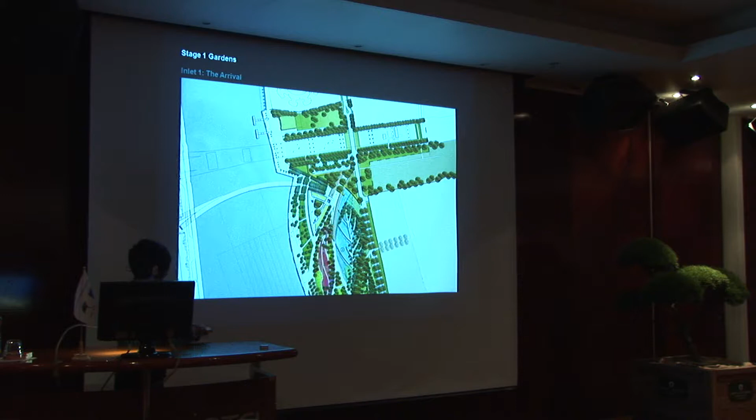And then we can draw off that water for our own irrigation needs and for the main water features. And then that water gets treated and pumped back into the reservoir, so it becomes a closed system, and that helps the reservoir to keep oxygenated and to not grow algal blooms when the weather gets too hot. So that was quite a good symbiotic relationship between our garden and the wider water strategy for Singapore.

It's an aerial view that shows that entry piece, the pedestrian bridge, the visitor center, and this aquatic garden.

The next leaf is a big color display garden, and then you have a series of paths that come down to the water edge. You can see how we were really trying to break down the edge so that people can get right down to the water. The boathouse, as we developed the plan, ended up on the northern side of the bridge, up in this area, with a slipway that allows boats to get down into Marina Bay. You can see in the cross section how all of the levels are really being defined by the flood levels of the bay.

At the lower level, you have the normal water level. Then the first pedestrian level is set just above the normal flood level, so in the event of flood, people can move up to the next level, which is set at the 100-year level. But all the buildings are actually set up at a level that's above the maximum flood levels.

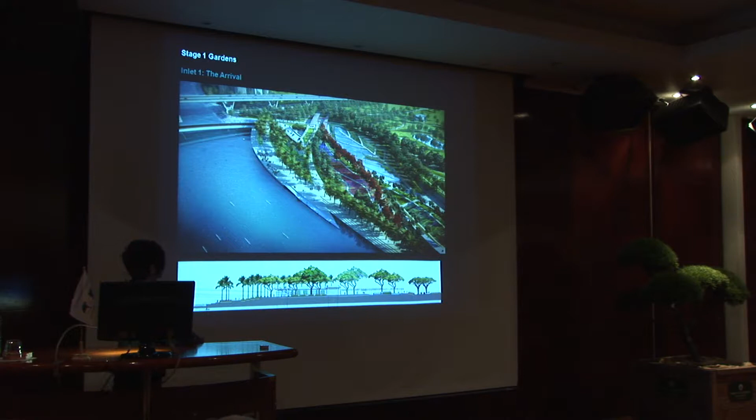It's a view of the visitor center, so people arriving at the park would come and get information, maybe look at an exhibition before they're drawn into the park to see the different activities and gardens. This is a view of the visitor center again, where at the top we also have an area where people can stand and watch the boat races. The building is completely open in the sense that you can move through it. There's a central courtyard that then has views out to the water, and we were always very conscious of this connection between the park and the water and framing views of the water.

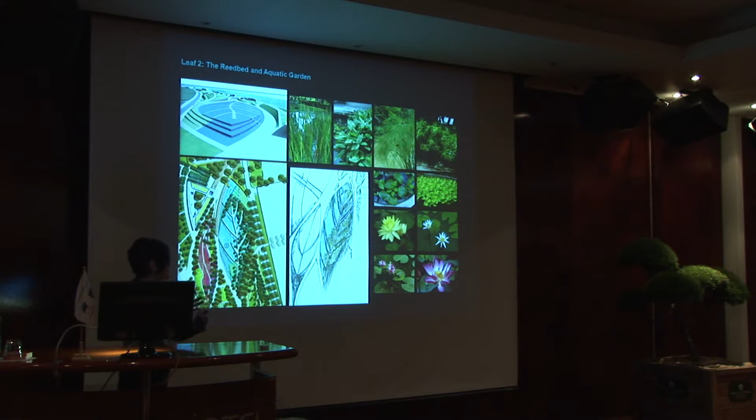The view of the second leaf, the aquatic garden, and its reed beds. You can see there's a series of terraces moving downhill toward the water. As it engages with the visitor center at this edge, the leaf is gently pulled up, and there are a series of terraces that create a water feature at the entrance where you can hear the water and you're drawn toward the park to move through it.

And a view of those water terrace gardens as you're moving through. They will be filled with aquatic planting, and the water is actually being filtered through a series of gravel beds in the lower layers.

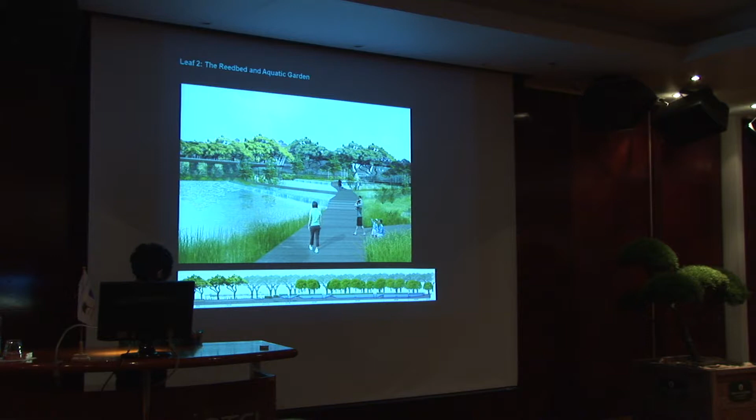Color garden. The color garden was meant to be a garden that can change constantly, so you might have different flower displays that change in color and feel throughout the year. That's located near the entrance because we felt there are a lot of tourists and people who would come just to get that picture at the visitor center and then get back on the bus and move on to their next experience.

We had a funny time trying to understand the brief for parks and how Singaporeans really live, what is their lifestyle. They kept talking about this thing, lifestyle. We want lifestyle. And I said, well, what is lifestyle? Lifestyle is how you live every day. And he said, no, lifestyle as a kind of - which we then slowly understood as being able to go to restaurants and food and beverage units and that sort of activity. It took us a long time to understand this concept of lifestyle.

So, yes, the view of the color gardens, and in these sections you can see how the ground is pretty much completely flat. We really wanted to create an elevated landscape, because if you get a little bit above the water, you start to get the breezes coming through, and you also get fantastic views of the skyline and the water. So the entire ground has been sculpted and molded in a way to allow you to have a series of different spaces at different heights, and the forms of those are all these giant leaf shapes.

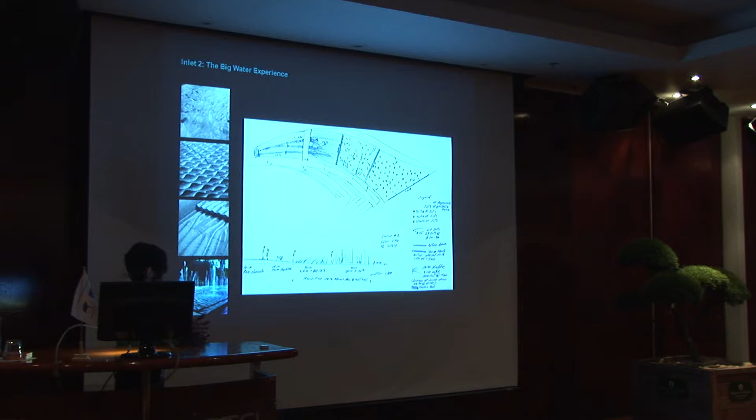Again, we tend to work a lot with water features, and we can create these different effects not only by how we sculpt the stone and create different effects just by gravity and water running over it, or by jets. This big water feature has a plant room underneath it, which is collecting the water from the site, filtrating it, purifying it, and then using it within the garden water features.

Again, a 3D view, and how we sort of create this sculpted edge. This is an edge that allows you to get down to this water feature, which can be drained down and used for big events. And so these sides can be used as an informal amphitheater seating area.

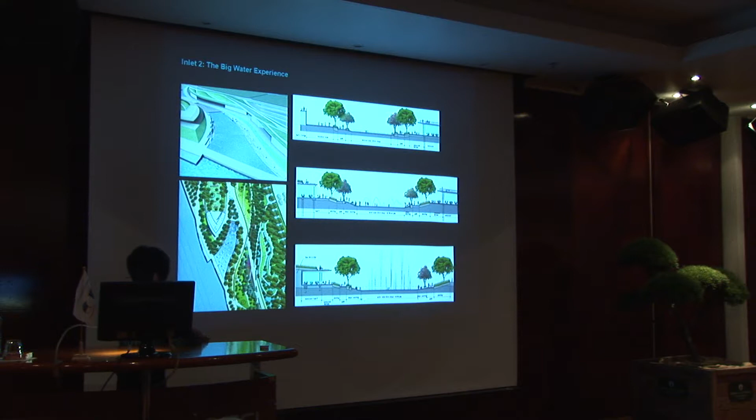And then the relationship of the restaurant to the main water features, and a view of that big water feature at night. You can see from each space, you're always being drawn through and into the next space by the next activity.

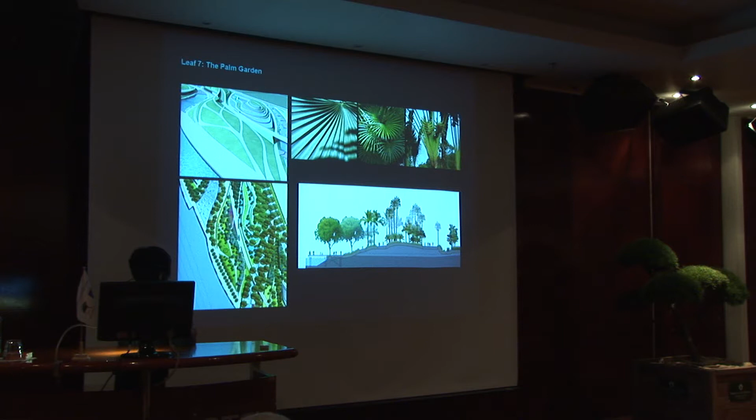The next leaf is the palm garden, so that will be a garden which will be a botanical display of all the different palm types and leaf shapes. And then this is another aquatic garden, which really takes its form from rice paddies.

Then the next area is what we call the Romantic Valley. That's a very long linear water inlet, meant to be quite an intimate space where people could have weddings and that kind of thing. So again, very lush, very dense planting, very intimate feel.

But again, with this very sculpted edge. So always there, within this natural world, there's always this very integrated, man-made, designed hand.

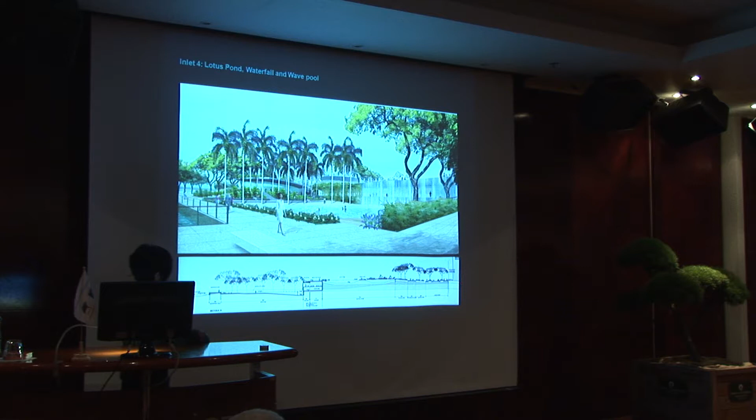But we did then create a swimming area so people could actually engage with the water. In this section, you can see how we're creating these sort of quite extreme level changes from what is a relatively flat site. This is the bar and restaurant that's tucked behind the waterfall.

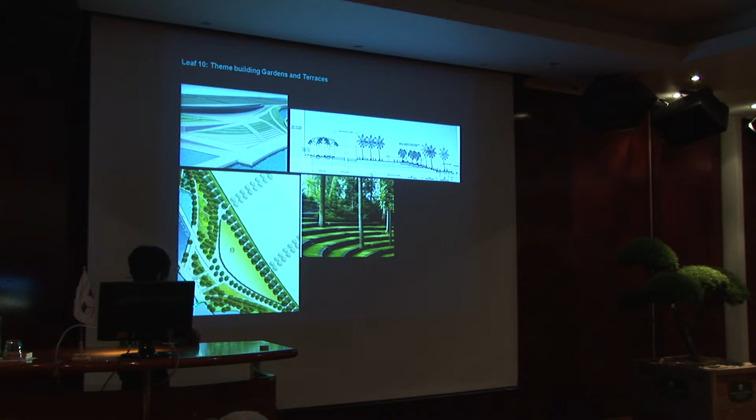And then at the tip of the island, where we start to meet the sea again, is a building which has yet to be defined, but it could be a cultural building, it could be a convention center. It's quite a large footprint of a building that is like a big leaf shape that tilts up and faces the water, creating an amphitheater space where people can gather for outdoor events.

And then finally, at the tip of the peninsula is a boat lock. This is the way they get bigger ships from the sea into the Marina Bay. They come into the boat lock and get lifted into this area.

And this channel is a more natural channel. Originally they just had a piped connection coming across our park to service the drainage water from this future residential neighborhood. So we built that into the design, and this is actually a stormwater drainage system that comes through here, with a much more naturalistic feel. You can see here it's normally filled with water, and then in a storm water condition, it gets filled up to here.

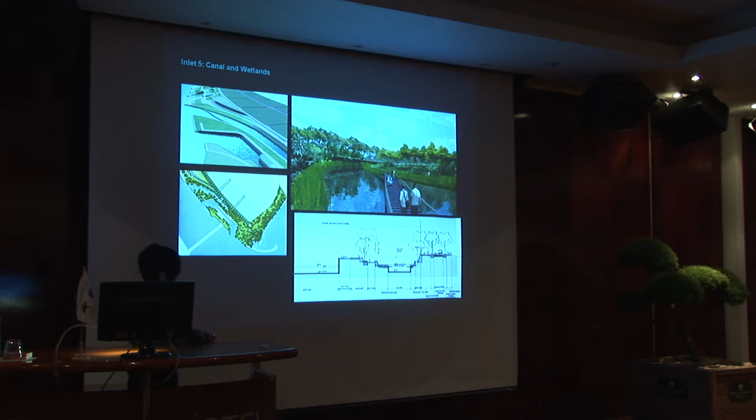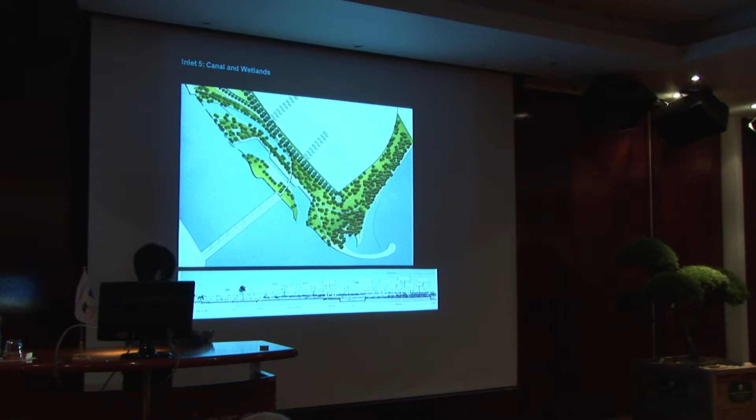And then finally, the tip of the island - this is seawater, this is fresh water, and then you get to the end and look out over the sea. So this is our site currently, and you can see the adjacent golf course, and this is Marina South.

Then I wanted to take you to a very, very different place. This is Mezyad Desert Park in the UAE, in the United Arab Emirates. And it's meant to be their first national desert park. Our client is ADACH, the Abu Dhabi Authority for Culture and Heritage.

And this region has just been awarded UNESCO World Heritage status as a World Heritage site. So hopefully they will move forward with the project.

It's an incredible site. This is a desert gravel plain with this mountain that rises out of the plain. And along the base of the mountain are many Bronze Age tombs from nomadic peoples traveling along - it's actually on this side, in the shadow of the mountain, mostly at night, but also late afternoon is when they would move. And there are quite a few tomb sites, important tomb sites, as well as all the natural sites of the wadis that are created as the water comes off the mountain.

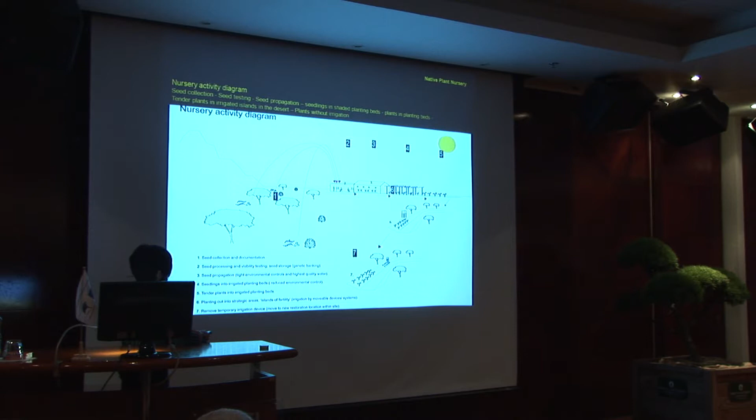The idea was to replant it only with native plants, but true natives actually from this site rather than from any other site around Al Ain or the region. So collecting the seeds on site and storing them in a seed bank and then propagating them on site. It was a real chore with numbers, trying to imagine how many seeds and how many plants one would have to grow to repropagate a desert of this size.

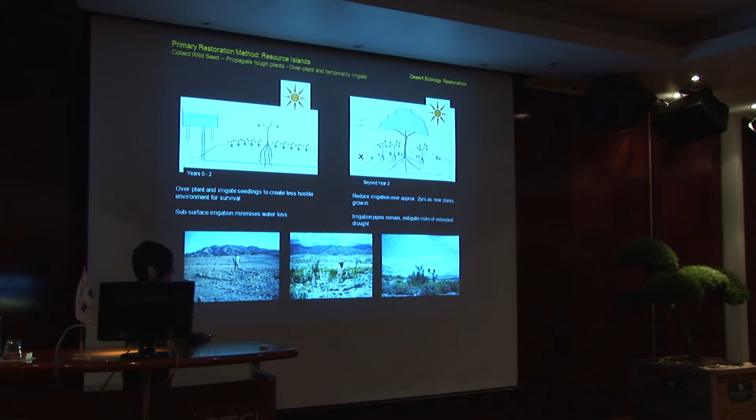And it's enormous, and there's a huge failure rate because of the lack of water and the intense sun. A lot of the plants will die, so the failure rate on the plants was estimated to be about 60%. So having to really grow and plan out the repopulation of the desert over a fairly long 10-year period of time.

So this was a survey that was done of the plant distribution in an area called the fenced corner, but that was an area that was fenced so that it wasn't eaten away by the camels and goats. So there we were able to see more or less what the native distribution of plants would have been, and then try and recreate that in a framework. In this case, it's a 10 by 10 meter framework, and then apply that across the site.

We were really concentrating on very specific areas because obviously it's a huge area to repopulate, but looking at how we start to jumpstart the whole process by locating the initial tree planting and smaller shrub planting in areas along the wadi where they are likely to get water in the event of rain, and strategically where we can place the plants.

We then did a series of tests out in the desert. We started to do some tree transplants to see whether or not we could transplant trees from the plantation band into different areas, so that would help to kickstart this whole process by creating the shade that would then create the protection for the younger seedlings.

So this was the project to design a nursery. There's a nursery building, which is a controlled, air-conditioned building to control the conditions within it. And then there's a big shade house outside of the building. As the seeds get to be a certain height in the plants, they get moved out to be hardened off under a shade cover. And as they progressively grow, they get taken out and exposed to more and more sun and more heat until they're acclimatized and can be moved out into the field.

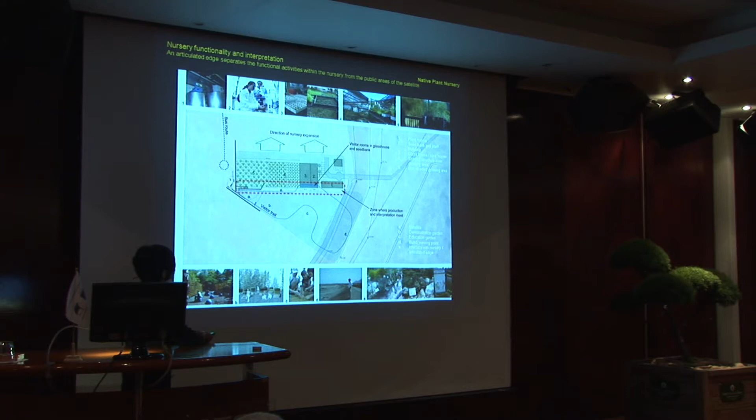So there's some images of what we're trying to achieve, and this is a partial image of the overall site. But you can see this is what we call the entrance landscape off of the main road between Mezyad and the Oman border, and that little speck there is the visitor center.

And then we developed a series of trails defining how people and small vehicles might be able to move across this terrain. The land has been disturbed not only by the goats and camels, but also by heavy trucks and vehicles during the exploration for oil in the 70s and 80s. So there's a lot of compacted tracks and trails across here. We need to ensure that we very carefully plan the vehicular routes and the pedestrian routes as we're doing this very careful desert restoration project.

So within the wider park, there will be a series of satellite buildings where people can go out, where they can get water to drink and maybe a map to orientate themselves, and then they can trek out and visit, in this case, the natural feature, which is this white wadi that comes off of the mountain, and in this case, the tombs, the Bronze Age tombs. And in this satellite, they can come and visit the nursery satellite and the nursery project for the repropagation.

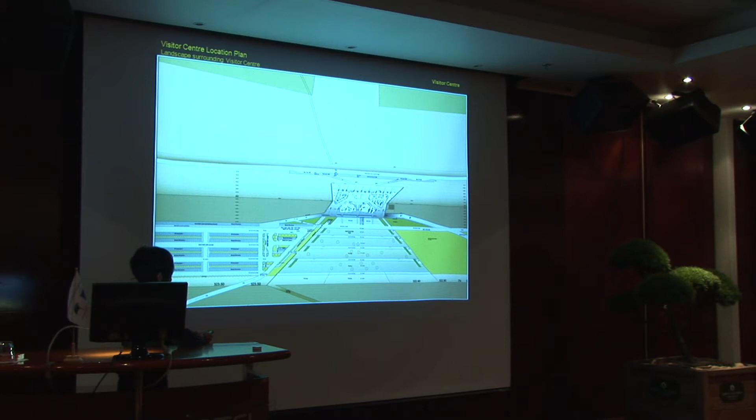This is a visitor center with an area where you can see an orientation film, education rooms for classrooms, and a big model of the site, so people coming can first orientate themselves around a model with a complete view of the desert before them, clearly seeing where to go. There's also a cafe, restaurant building, and the main exhibition pod.

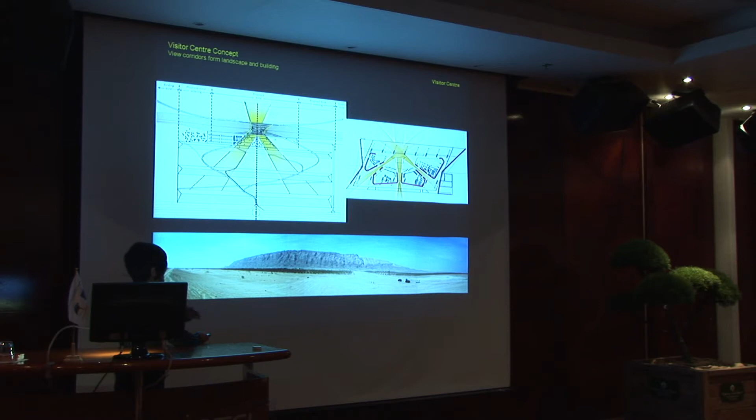We're very mindful of how one preserves views through and out into the desert, because that is really the experience. We didn't want the building itself to be the attraction, but really it's the view and the desire to move out into this landscape that was important.

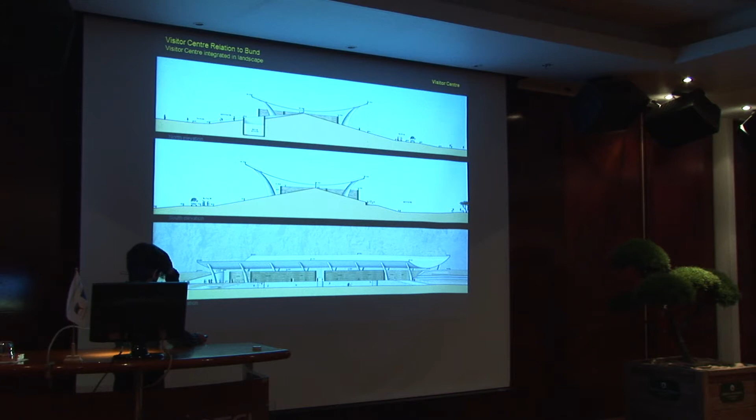We did that by locating the building actually on the sand bund, so that what you're seeing of the building is minimized and basically buried within the existing sand bund, which is the flood protection between the desert and the city. And then creating this big roof that would create shade cover so many people could gather there and be in an external environment, only air conditioning the areas we needed to.

This is a view from the desert side of the restaurant building and the education building. People would come out after the orientation, move on to electric vehicles, and then move out to the site.

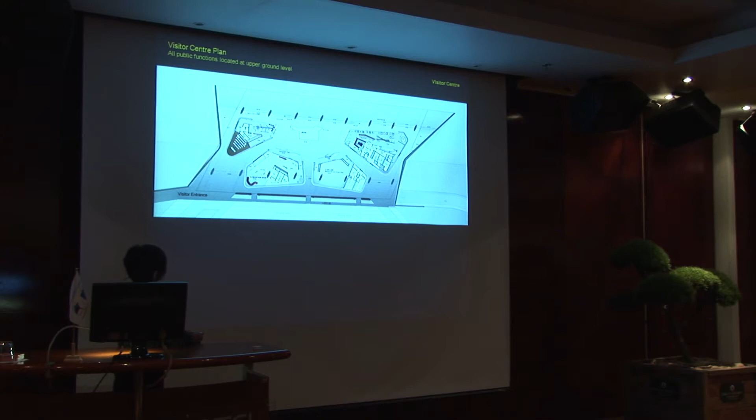A plan of the building, and a view from the big orientation model - as you can see, there are big views. So as you're within the visitor center, you can look out, orientate yourself, and then move out into the desert landscape.

I wanted to talk quickly about a project you've probably all seen, the Diana Memorial in London. In this case, it's really about how one creates these various water effects. As you probably know, we were trying to use these water effects to symbolize different aspects of Diana's personality.

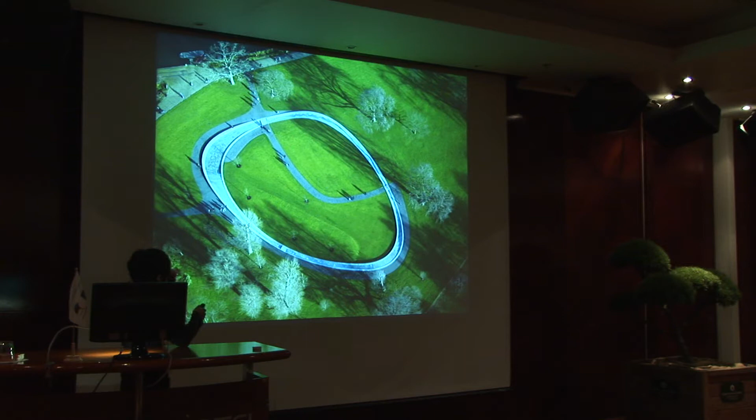But we did this by - most of the water feature is done using gravity. So it comes in at a high point, and the gravity is generated from the natural contours of the site.

We were also very mindful that we're working in the context of a listed park landscape, and within the brief, we had to work with the existing Serpentine lake. The water for this water feature is actually being drawn out of a borehole that goes 80 meters into the ground, located off to the left here.

So it's all natural water, and it's untreated - not chemically treated. It's an open system with the Serpentine: we use the water, it goes back into a storage tank, 10% of the water gets flushed out into the Serpentine again to keep down the algal blooms, and 90% of it is stored and topped up with 10%, then recycled around the feature again.

This is a plan view of that from the top - this is the source area. All the water is being pumped up into this high area, and then it falls gradually about 2.5 to 3 meters drop from this point down to the tranquil pool at the bottom.

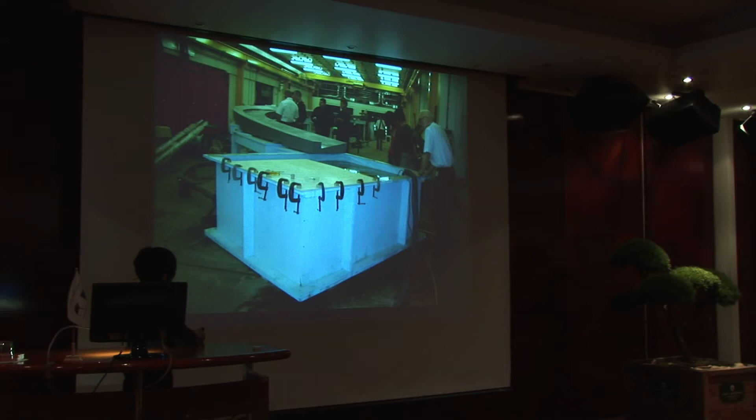This is at Imperial College in their hydrology lab. This is actually a quarter-scale model of the rock and roll piece, but we mocked it up full scale and tested it with a professor at Imperial College, to really send the water down, look at the effects, and be able to adjust it before it was literally carved in stone.

Seem to have frozen. Don't know if it's out of battery, but it seems to have frozen. Was Bruno on? Oh, okay.

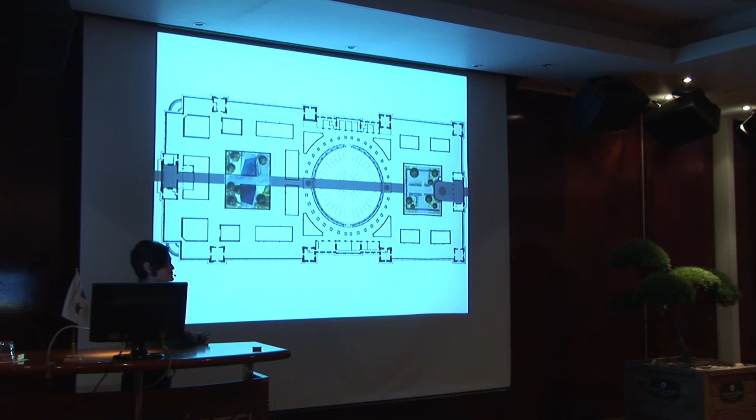And then just quickly, another water feature in the Treasury courtyards in London, in the government offices in Great George Street, where we did 2 different kinds of water features. This feature is over the top of the cabinet war room, so of course we had to be very careful with all the waterproofing and effects. But how can one use water to create these different effects? In this case, it's reflecting the listed building.

The water feature can be used and enjoyed by people sitting out in the cafe, but it can also be drained down and used for parties and events. And in the other courtyard, a very different feel, where we created this water rill. Again, the background sound of water creates a very tranquil atmosphere.

And this courtyard is surrounded by a library, so people can go out and quietly read a book and be in this very intimate setting.

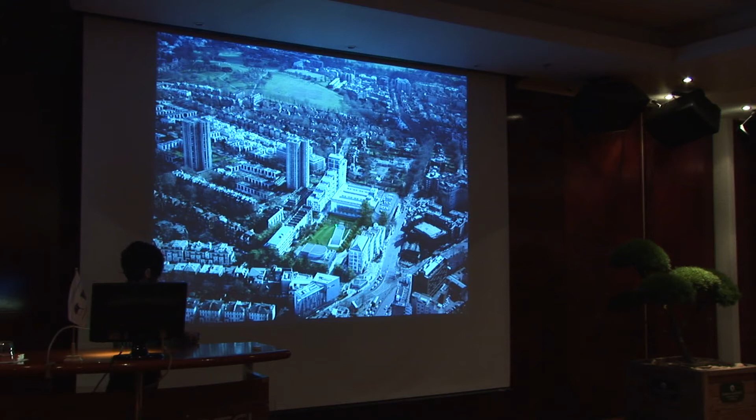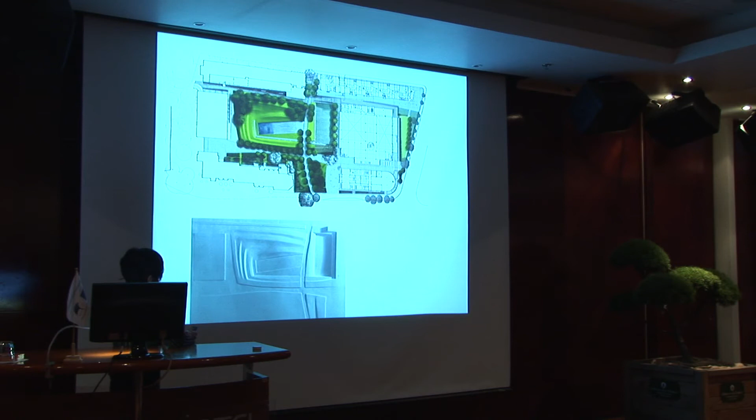Then another water feature project, a garden in Swiss Cottage in London, where the water feature really becomes the heart of this community redevelopment project. There's a theatre, a sports centre, the library, and the residential building, and the park is really the thing that's holding those various buildings together.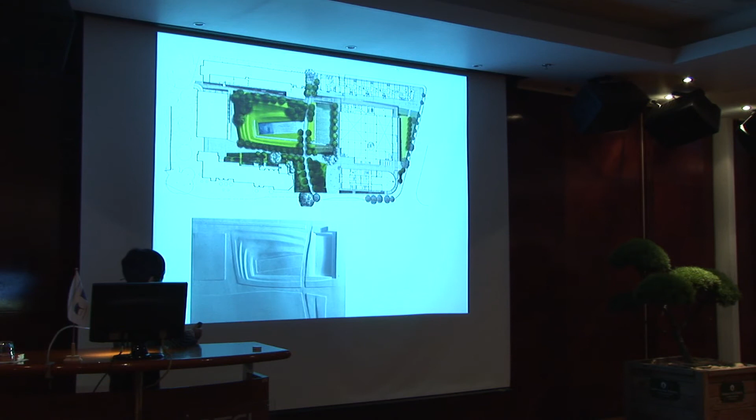This is a five-a-side football pitch. The water feature can be drained down and used as a staging area, with the natural amphitheatre that surrounds it working together with the theatre. The theatre foyer is in this area, so as you come through, you get these big views of the sports centre and the park in between.

When it's not being used as a water feature for children to play in, it's drained down and kids end up playing football and rollerblading and roller skating in the base of the fountain. It's a very well used community park where water is the sort of animating feature.

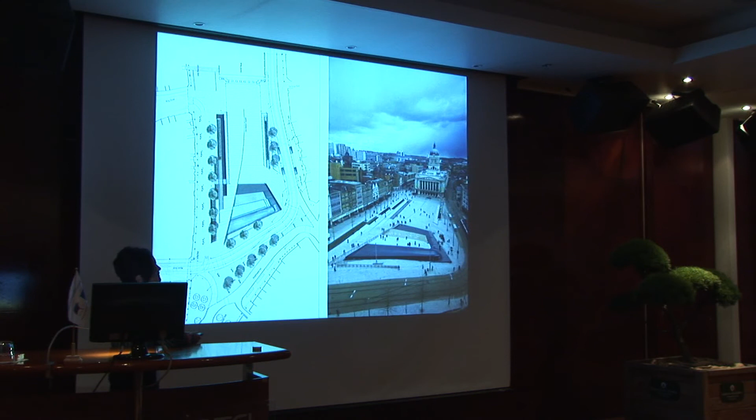In a much more public space in Nottingham, there's a major water feature which becomes the big attractor in the square. The wonderful thing about this square is that it's programmed almost 365 days a year. There's some event planned by the Nottingham City Council, from the big Ferris wheel to the Christmas fair to markets to all kinds of different displays. It's really very well used and programmed with events throughout the year.

I think it's stuck again.

Bruno? Oh, tell me how much time I have. Well, 5 minutes. 5 minutes, wow, okay, I'm going to whip through this then.

The interesting thing about these projects is that Solidere, as the development company, invest in the public realm before the buildings that come around it. They've acknowledged that if you create a high quality public realm, that will inspire developers to develop the adjacent plots of land. It helps to stitch together a city in a way that I think is really quite innovative. It's not done in all cities, and they've had the foresight and wisdom to recognize there's huge value in developing, designing well, and building public realm.

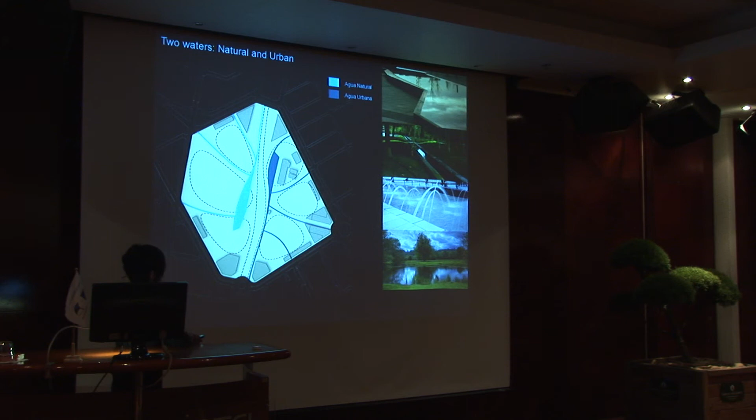Again, water was a very important starting point for the concept. On one side we have a natural water system, a big natural lake, and on the other side the urban water system, a big cultural water feature in front of the main cultural building. Those two systems come together to form the framework for the design of the park.

And again, using landform to define those bowl shapes. This is an image of the overall park.

So we have the main connection to the city, with the main train station here. This is the Northern Plaza, the gateway to the rest of the park. There's also a whole area to the south, a new residential area where we've been developing the streetscape and public realm play space guidelines.

As you move through the park, this is the main north-south boulevard, lined with a series of palms and jacaranda trees.

Then you move into this area, which is a cultural center. These are all existing buildings on the site, so all the old railway sheds are being renovated and will have cultural or educational functions that work together with the landscape within the park. Some of these sheds are being rebuilt and relocated to the perimeter to free up space within the park, but each one will have an activity.

In this area we have what we call the Huerta Gardens, display gardens for the traditional orchard garden that used to be present around that agricultural plain. This is a children's play area.

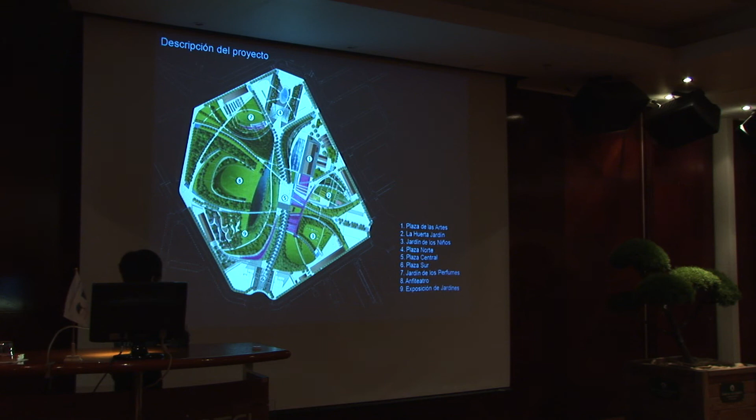It's raised up quite high. There's an existing substation here, so we've raised it up to be over the top of that, creating a natural amphitheater shape. And then in this area, a perfume and scent garden.

So that's the aerial view, where you can see the cultural building, the Huerta garden, the children's play area. In the back here, the Mediterranean display gardens, the amphitheater, and the perfume garden.

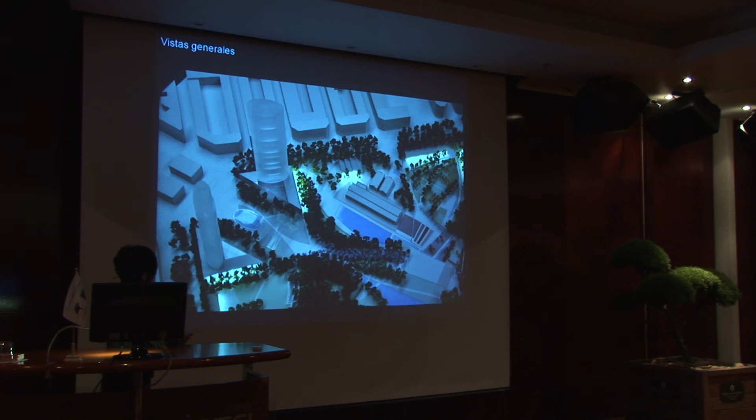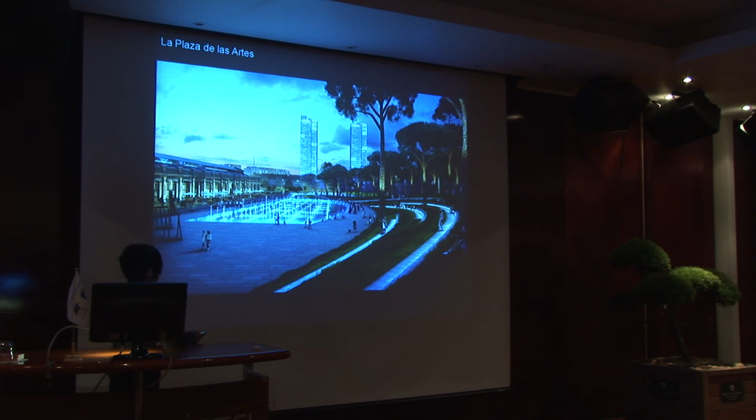These are some images of the model. The main water feature in front of the cultural center is very active, with lots of jets, a big display, and lots of light at night. It's where all the energy of the park is, one of the main poles of attraction within the park.

So each one of these spaces has a very different character and a very different use, and it's always framed by this landform, by this enclosing bowl, with a low point where we're collecting all the water and taking the rainwater as quickly as possible back down into the aquifer.

Valencia has a very high water table, so water is not necessarily a problem, but the challenge here is in the whole recycling strategy of the water.

I think I'm stuck again.

So this is a view of the main central spine with its flowering jacaranda trees. The idea is to have many different activities off of that spine, places where people can play, sit, rest, and be under the shade of the trees.

The main entry, the North Plaza, with its big water feature and gardens to the side of it, and then this is the main north-south path leading into the southern residential area.

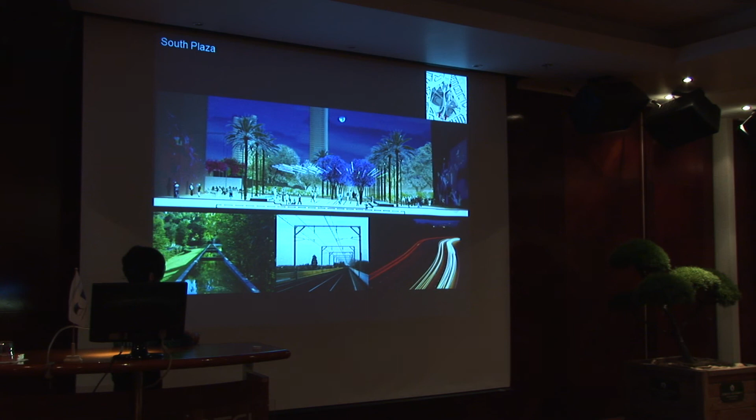The South Plaza, where we wanted to have a lighting art feature, a memory of the catenary systems and the electrification that used to run through this site, now going below ground.

The natural lake with its aquatic planting, also helping to filter the water. The amphitheater space, looking through into the floral gardens.

It's fantastic to be able to do a garden this big in Europe. I think we're very honored, and it's a very special thing to be able to do, because there aren't that many sites. To have given over this whole site to a central park is fantastic.

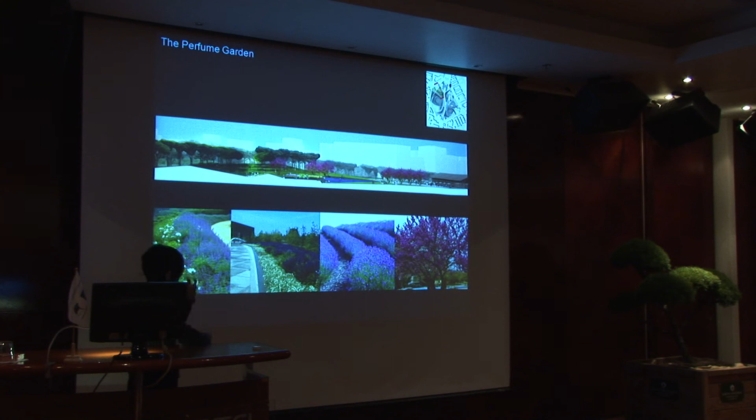This is the perfume garden with all its scents and textures, and then again the overall view. Thank you very much.